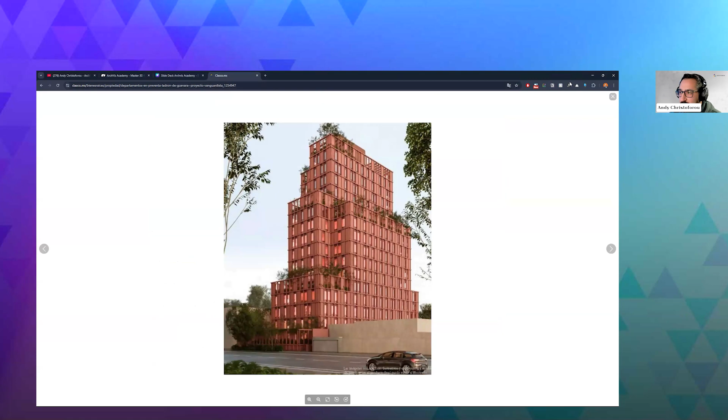So how I start is I go over to D5 and I'm just going to hit new, and it's going to load up a project. While that's going, let me just check the chat, see if anyone's in here or any questions. Cool, all right, great. So I'm going to X out of this and go full screen.

With any D5 project, the first thing I always do is switch the navigation mode from orbit to fly, just because I'm most comfortable with the WASD controls, and all the move controls are down here. I'll talk about which keys I'm pressing, but if you see me moving differently from you, because default is orbit, that is why. I don't believe in orbit, I'm team fly here. So let's get started with importing.

First thing you do, you go up here to import. There is a SketchUp plugin, but for those who don't have SketchUp, you can use the direct import method. So I'm going to hit import here, and I'm just going to open up the SketchUp file. You guys have this in that link that's been shared. And now it's going to be added to my import container right here.

Always remember that the import container is different than your object outliner. This shows everything in the scene. This shows everything that is in your import container that has to be imported into the outliner. So I'm going to click once and then click here. Right now, this model is in the middle of nowhere — it has an incorrect coordinate system.

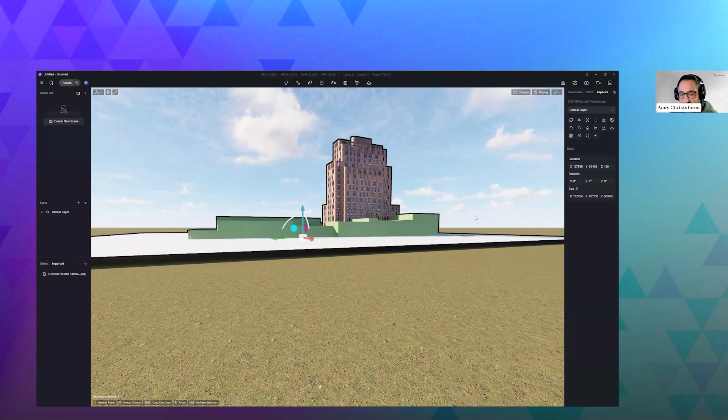So we're just going to hit this button called sync coordinates. This is really important if you work with multiple people at the same time. Let's say you're an architect working with a landscape designer—they need to bring in their own file. If you use sync coordinates, everyone's coordinates will sync to the same place. For those Revit users, you know how important coordinates are. So I've got that there.

You can also see that I've got terrain clipping in here. So I'm just going to go over to my object outliner and hit the eyeball on terrain to turn that off. Next thing I always do is make sure I don't work in the dark.

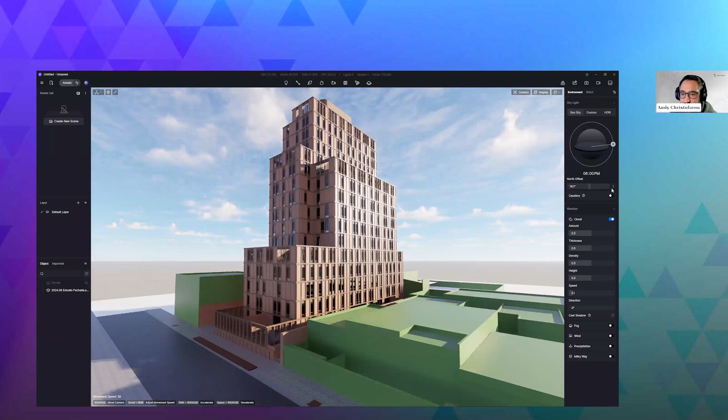So right now the front face of the building is in shade. The side is bright, but when I'm doing materials, I always want to make sure I'm working in sunlight. So I'm just going to tweak the north offset just to get a little bit of sun on both sides. Exactly. Now I can actually see what I'm doing, because you should never work in the dark.

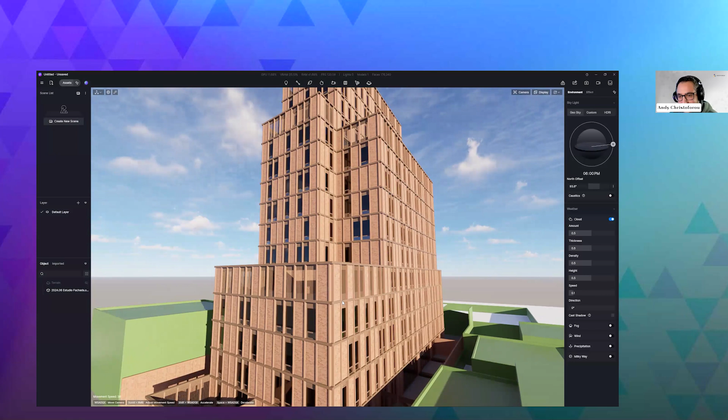So first thing we want to tackle are our materials. Then we'll get into adding some entourage—trees, ivy, and all that—and then the context, and then we'll take some renderings. Right out of the gate, I feel like the model already looks better than the reference images, and I think part of that is due to the SketchUp model actually having mapped textures.

One of the issues, or issues and benefits, is this is a texture map that someone actually spent time to map correctly. There's no half bricks—there's actually some beautiful brickwork here that they took the time to map. So I don't want to overwrite their work or put a new material that doesn't map correctly. I can actually use this. So although it's a flat texture from SketchUp, I can modify it.

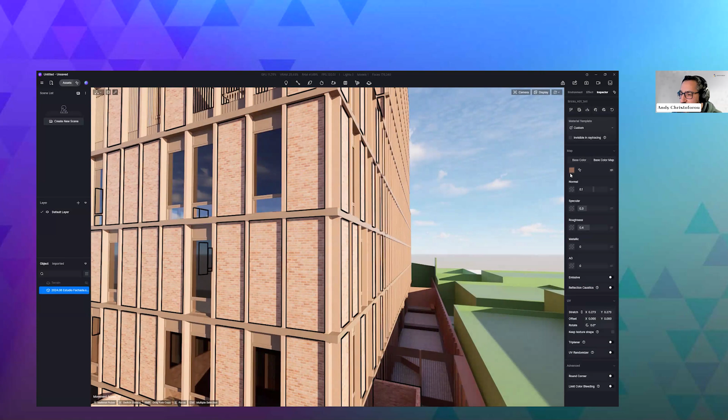I'm going to hit I on my keyboard, or click the eyedropper, and click my brick material. Anything that's brick is going to be highlighted in black—this is how D5 tells you if something is selected or not. So now that I've got the brick here, you'll see I only have a base color map for this brick. It's missing all the other maps, and because of that, it's not super realistic.

D5 has some amazing tools to improve that. This is a low res brick material, so what I can do is use the built-in texture enhancer and run an Ultra HD texture enhancer. It's kind of like if you've used Magnific—an image upscaler. It's going to take this super pixelated, probably 512 by 512 texture and make it look like 2K, so I can preserve all that mapping without starting from scratch.

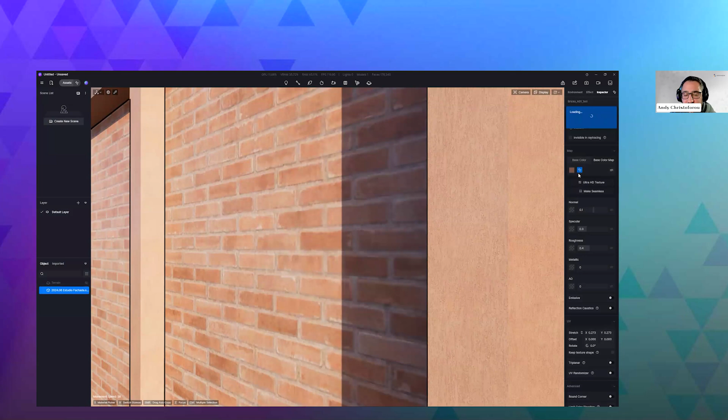So it's thinking for a little bit. Once it does that, I can run it through the AI generated material. Yeah, look at that—so now much cleaner. I'm just going to hit confirm.

Now I can run it through the AI generated texture map tool, and it's going to look at this and generate a normal map, a roughness map, and an AO map. These are things architects and designers hate to do manually, so I love that it's built in here.

And it's an automatic process, because to do this manually you'd have to bring it into Photoshop or another tool like Bitmap to Material. You'd have to convert the image to a normal map, then convert your base image into black and white to make your roughness and everything. It's time consuming—nobody does this. That's why in-house renderings sometimes look flat, because people don't know you need all those maps. D5 understands that, and they've basically fixed that workflow issue.

So right now it's going to think—and look at that, it's added all this detail here. It added the normal, and if you don't know what that is, it's basically how proud the brick is from the mortar. It added the roughness map, basically how shiny or where the brick should be shiny, and an ambient occlusion map, which is AO.

AO just controls the contact shadows—here's nothing and here's something. So it just added all that realism in just seconds. That's why I'm a big fan of it, and I didn't have to use anything from the D5 asset library.

I used something built right into D5. This looks great. All I'm going to do is toggle something called round corner, and for any exposed corners, it's just going to round it out. I'll show that in other materials, but it's a good habit to get into, because nothing in the world is perfectly straight or sharp like this. We'll talk about fixing that in a moment.

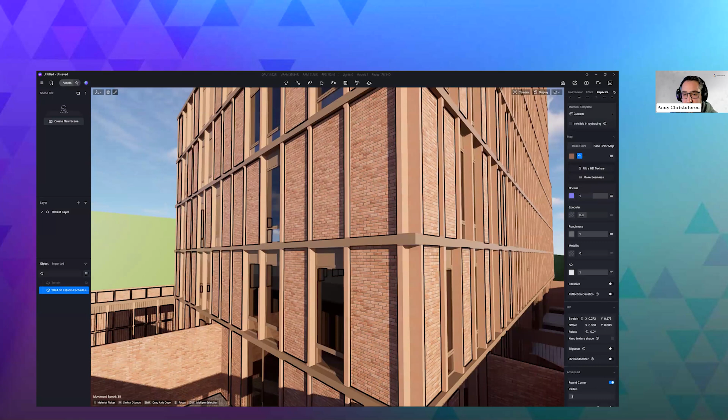So now that the bricks are in a really good spot and they look realistic, not tiling or anything, this is all mapped nicely. Let's start working on the other materials. There's a couple we need to tackle: this spandrel kind of tile here, this vertical plaster stucco material, and the landscaping materials. Let's work on these vertical guys.

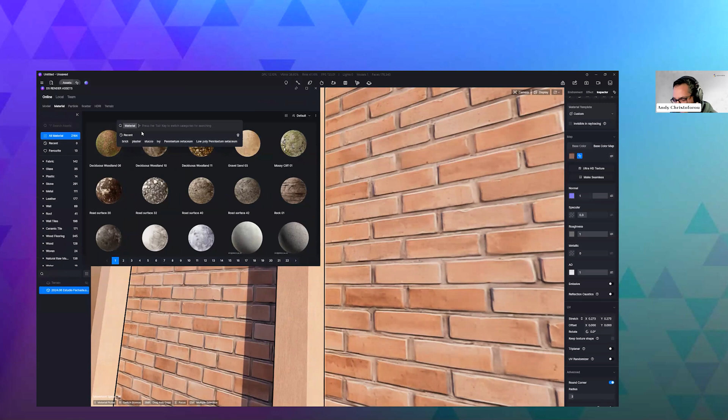I could go through the same process we did, but I want to show you the fun parts of D5 and the asset library. So I'm going to go over to assets, click that, make sure I'm under material, and look for some sort of plaster. You could search for plaster or paint. We've got this — let me try beige plaster.

I know you're probably saying, well, this is beige and this is like red and orange, but I'm going to show you how we can tweak that. I'll hit I on my keyboard, and now we can see everything is this gray material. It is high res though — if I get up really close, I can see all the different pores. It looks super realistic, but I do need to tint it.

Right here under base color, if you click this, there's a little color picker. For those that work with Pantone chips or even metal samples, you can hover over a picture and it can be outside of D5 — it doesn't have to be within D5, it'll pick up those colors. Like here it's picking up my skin tones and my background as colors. So if I click anywhere on this brick, I now get that same color of the brick.

All I'm going to want to do is probably desaturate it a bit so it's not that vibrant color. That's what these guys are — hue, saturation, and value. Saturation lowered is going to desaturate it, and value is going to brighten it, moving these guys in the respective coordinates. So you see that? I'm happy with this — I don't want it to be too orange.

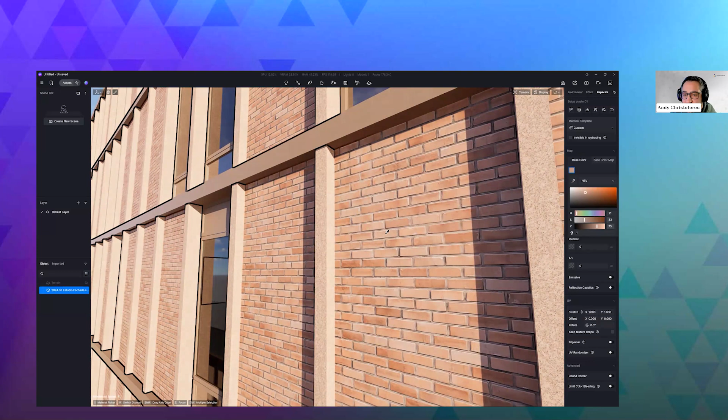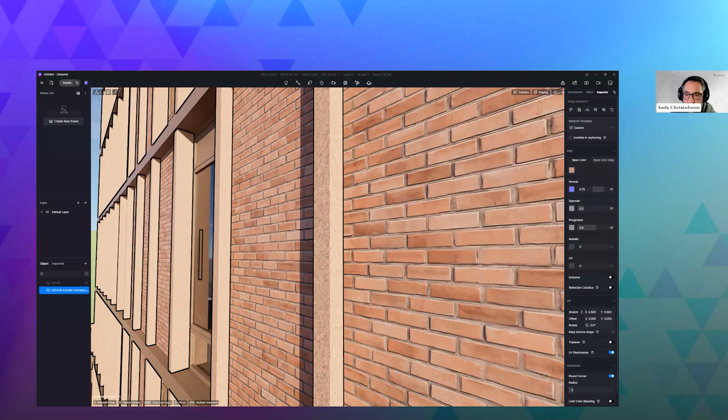Now that looks good, let's go through some of the settings. I think these are all calibrated correctly. I'm going to turn on UV randomizer just to make sure it's completely seamless, and turn on round corner, which fixes this edge here, because with plaster and how it's molded on, you're never going to get that sharp corner. That looks good. I could play with the scale some more — let me try 0.5. That's a little too extreme, so I'll do 0.8. Every single material and texture is going to be different, so it's not like you can always say it's got to be 0.8 — it's going to change, so keep that in mind. I'm happy with that.

Let's talk about this spandrel kind of thing — it looks like a terracotta tile. I'm going to go over to assets and go to wall tiles, and I've got all these fantastic options. Let's find something that fits. This one looks good — I like this dark red striped stone. I'm going to click this and paste it here. And it's coming out dark.

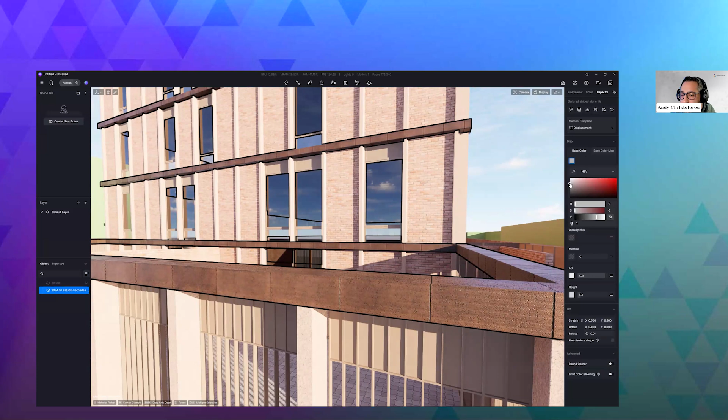So I'm going to do the same exact thing — I'm going to edit it and play with the base color. Here I'm just going to brighten it up by going up like that. Then if I want to take it to the next level, I can go to the base color map and desaturate it, which removes some of that color, and I can also brighten it.

So I actually like the look of that. Okay, cool, so we've got that. And just looking at the material, I can see the normal's working, the roughness is working nicely. I'm getting some nice variation, so that makes it look nice and realistic.

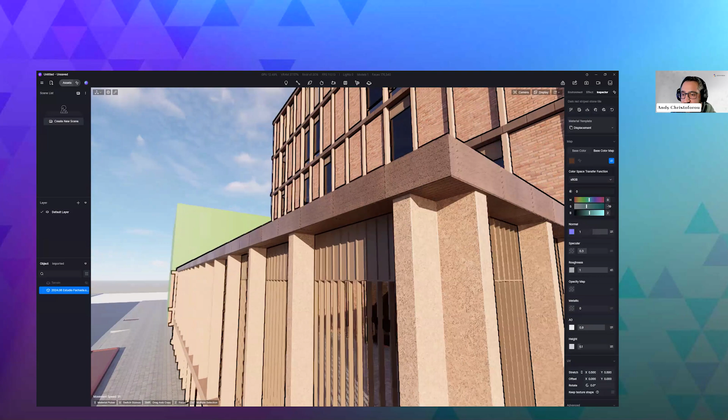Then we've got this metal here, that's basically the top and bottom of our windows. So you could do a similar workflow where you edit a material from scratch. I could play with the metalness here to tune it, or find something from the asset library. Since this is coming from the architect, it's very likely they've picked this specific color under the base color, so I don't want to mess with it too much, but I do want to play with the metallic settings. I want it to look like it's actually metal.

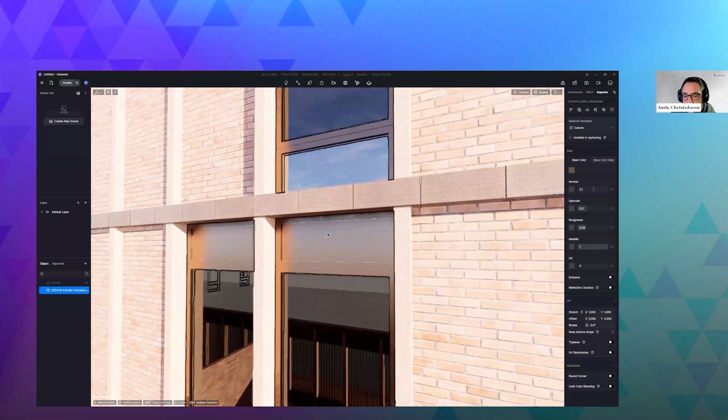You can see a big difference. That's flat, this is metal. So just doing something like that makes a big difference. Same thing with playing with the roughness - a 0 roughness will be mirror-like, higher than that is going to soften it up, scuff it up. And then this is kind of like rubber, right, which we don't want. We want something like this. And the normal here is helping break up the reflection.

So this is nice, this looks like a nice anodized panel. If I want more realism, I would probably grab something from the D5 library that's got some sort of texture - you see this, like the brushed aluminum. So that's something I could do.

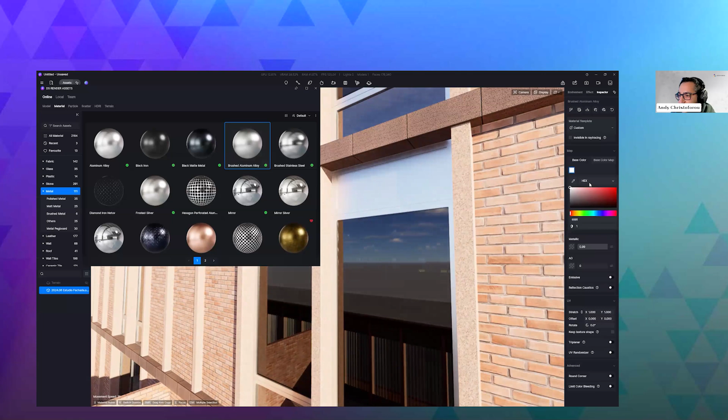So this is what I would do. I would grab my color values here, switch to the hex, and copy this to my clipboard because they probably want this color on purpose, but I do want the vertical lines here. So I'm going to grab this, paste it here, and now go to base color, keep my hex, and paste that. And that just took the same exact color, but look at that - now I get the correct base color and I get the normal that's controlling that, so it makes it look slightly more realistic than before instead of it just being a flat color.

So keep in mind that is a super handy trick that people often forget - hex codes go a long way.

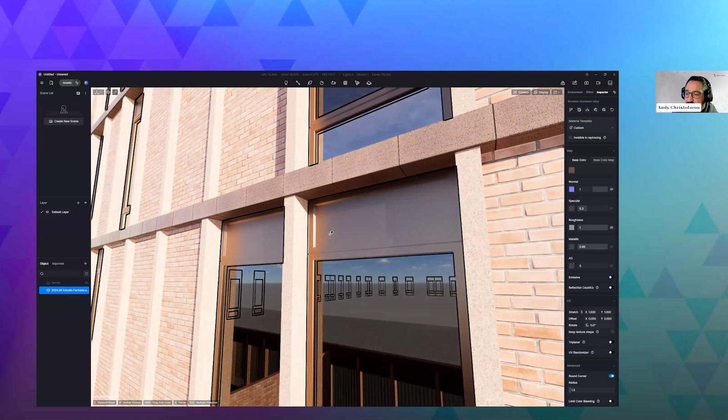Same thing with round corner - we're going to do that and get some nice corner edges right here. Let me toggle that on. You can see we're getting nice highlights here because they're molding or bending the panels. So I can lower this radius a little bit if it's slightly too strong, or make it bigger - you don't want to go too far, just a little bit of a highlight. That's how you know it's working correctly because the sun's hitting that edge. So that looks great, happy with that.

And just for the sake of my sanity, I'm going to hit Control S on my keyboard to save. And like a bad architect, I'm going to put it on my desktop. Sorry. All right, any questions so far?

Looks like chat is empty.

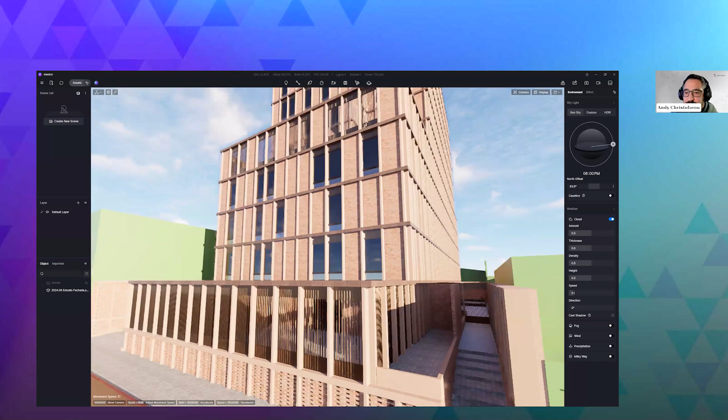That's fine. So now that we've got all that, let's work on the glass. So the glass, this is just a default material. I personally always go to the glass library and start with normal glass, so I grab that and paste it here.

Usually what I do is once I get the HDRI, so like the background and the time of day, then I tweak the actual thickness and opacity. So right now it's like 100% see-through - pay attention to the windows out here, I can see right through.

Then that's kind of when I start playing with, okay, are the reflections too bright, too dark? So it's hard to do early on until you have everything in there because you're not judging it off the final outcome. That's why I kind of leave it in limbo, in progress.

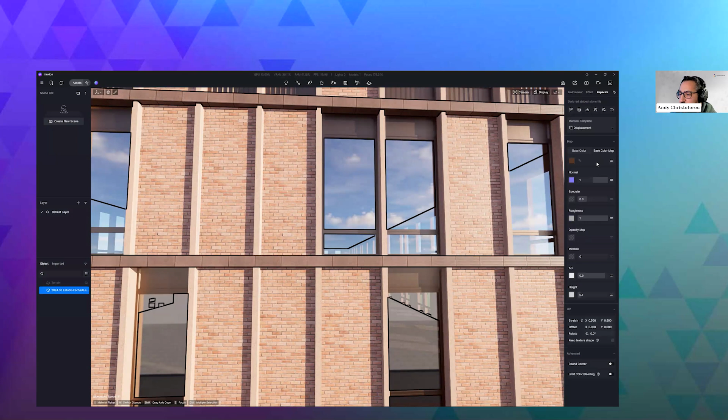So just looking at this overall, I'm pretty happy with it. There's some things I probably would tweak - I might just brighten this area up so I'm getting similar tones with the rest of the materials. Exactly, so that looks good.

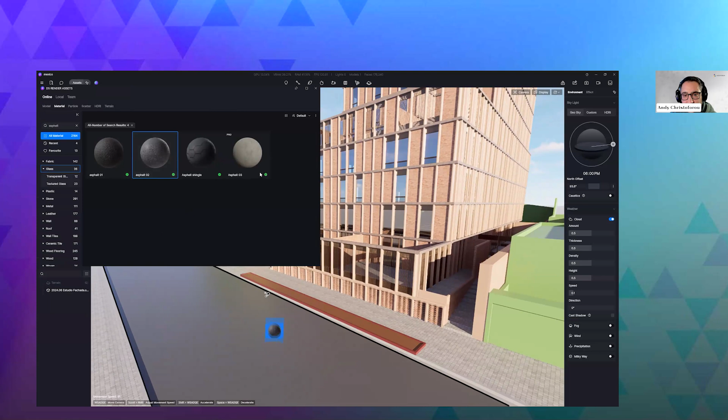So now let's talk about the context, our asphalt here, and all these guys. I'm going to go over to assets, and since I want asphalt, I can just type in asphalt - I don't need to find the category. I'm just going to grab this guy, asphalt 2. I could use 3, yeah, really depends. Let's see how this is.

So you can see, and this is why, if you guys watch my content, I always use the UV randomizer, because you see this tiling right here.

If you look really carefully, pay attention to this little triangle right here. That drives me nuts. You don't want that.

So I'm going to edit the material and put on the UV randomizer. But you're probably saying, well Andy, there's no UV randomizer option. That's because the displacement material template doesn't support that. Since this is asphalt, in my opinion, you really don't need displacement. So I'm just going to switch to custom and then I get that back. I can turn on UV randomizer and boom, it's completely gone. So it still looks beautiful and realistic, but I don't have that weird displacement thing turned on.

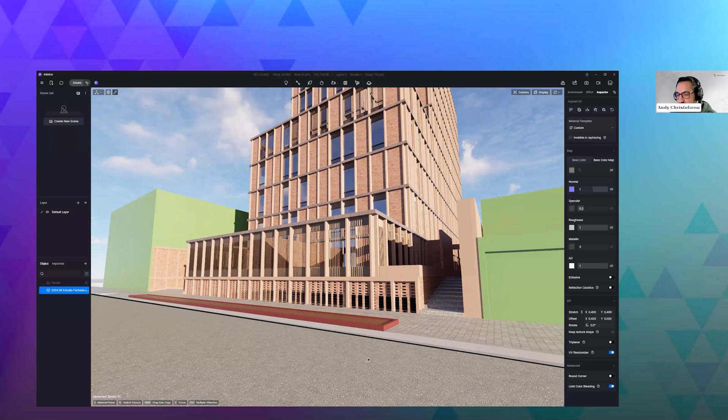So I could play with the scale some more if I want. Let me try 0.2. I think that's way too much. Do 0.4, that looks good. You always want to be able to see some of the texture. If it's too small, you can't really appreciate it, right? So sometimes I might go a little bit larger than you would typically see, because without texture it just looks flat.

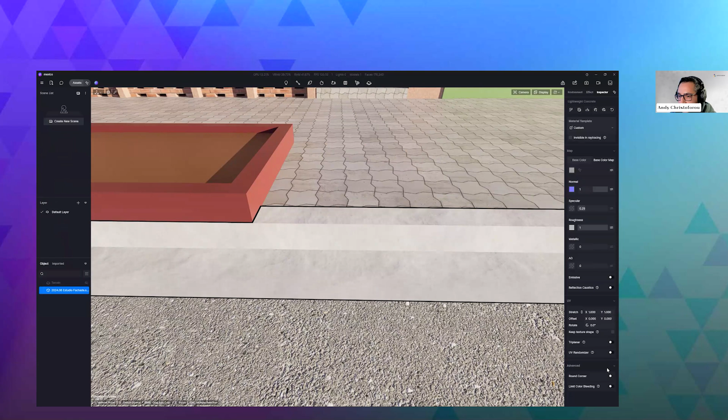So then let's go over here. We've got our curb, same workflow. Let's go to assets, and I'm just going to search for concrete, right under the concrete here. And lightweight concrete is totally good enough for this. So I'm going to paste that in. And like always, I make sure I've got round corner on, because we all know how concrete formwork works.

I'm going to leave that there, and I'm going to put on my UV randomizer, so that's all mixed up. And that looks good. I might bump up the scale a bit, let's go 0.5. Yeah, perfect.

Cool, all right. And now we've got kind of like this little planting area. So I'm just going to get a little curb for this and we'll get some soil in from there. So I'm going to again go with rough concrete, we'll just mix it up. And as always, get that round corner on. Boom. And now let's talk about the soil here.

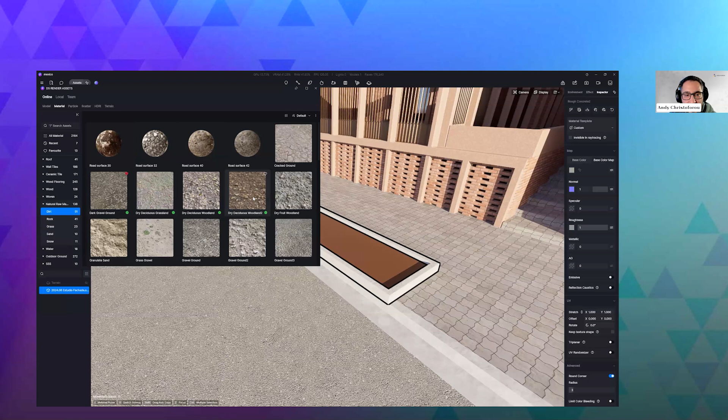This is going to be under natural raw or outdoor ground, there's a couple different options. I'm going to go with one of these. I like the stuff with leaves, because generally plants drop some sort of leaves, right? And this looks pretty good.

All right, so now all that's left is we've got this and we've got our context here. I really like the tiling that this person's done before in the SketchUp model, so I want to preserve this. We're going to go through that same workflow that we went through before. You go to base color map, go here, and then make it Ultra HD, so that's going to boost the resolution of this. Because again, they mapped it perfectly, I'm sure it was a spec from a project.

So I'm going to use this. If, let's say—this happens to architects all the time—you're working on a granite and you find the spec but it's tiling, you could use Make Seamless and it'll fix that. That's really handy. So again, use these tools, it's built in. It saves you so much time because you're not going to find everything in the D5 library, right? Like this is very, very unique. You'll get close, but it's not going to be perfect.

So this is now loading up the normal map, the roughness and AO, just so it gets a little more realism here, because this covers up a lot of surface area. It's important, like the large swath materials look the best, because that's kind of what gives away if it's a rendering or not. So this is loading.

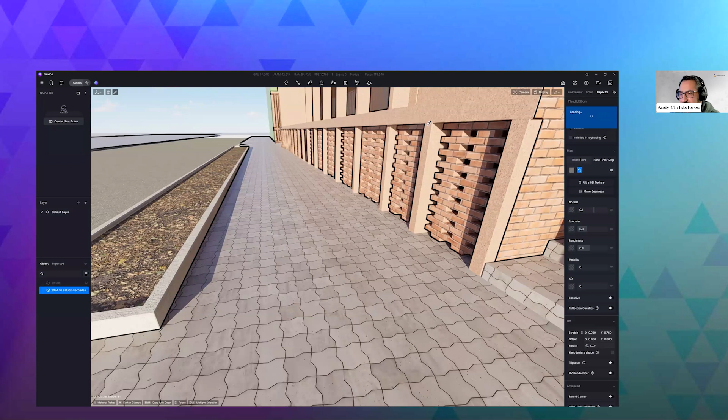And you could do things while it's loading, you could fly around, but I feel like I got into the habit when I used to do a lot of drafting to not jump around, because you never go back. So it's just something I'm scarred from.

So I've got this here. I'm going to lower the roughness a bit just so I can see some slight reflections here. You see that? I do want some gloss to it because it is kind of like a stone, yeah, some sort of polished stone. So we want that. I could boost the reflections with specular, you can kind of see that, but I'll leave it somewhere around there. So happy with that, turn on round corner. Okay, I should get a t-shirt that says turn on round corner.

And for our context, this bright green - every office handles it differently. Some do glass, some do basswood, some do white paint. So I'm going to go with the white paint method.

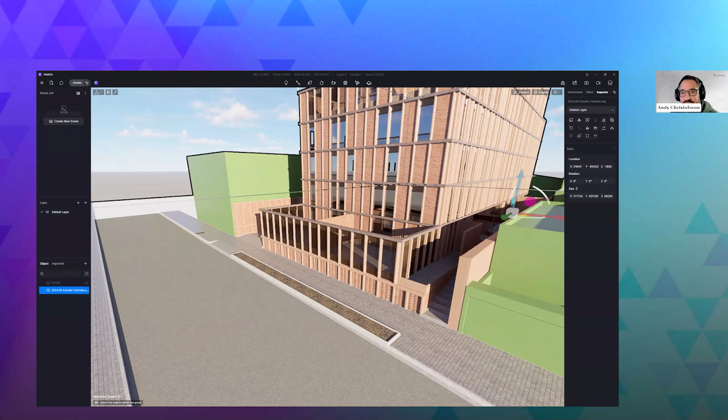But what I do want to say about context is in D5 2.10, the update actually added a city importer. I don't know exactly where this project is, but let's say you're working on a project in New York, because New York models are really hard to find. You can actually create a selection, so let's just say Bryant Park.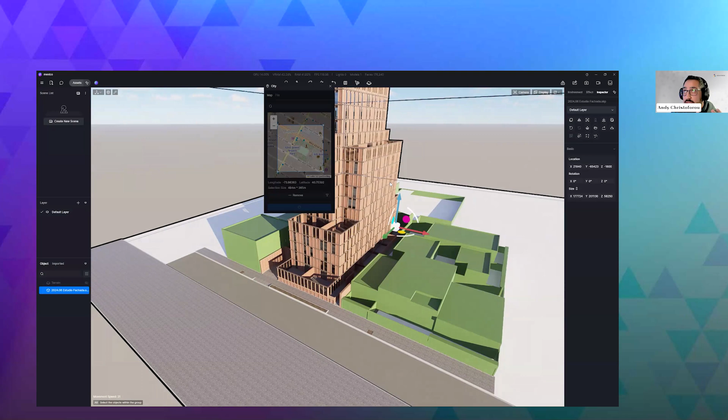You can ask it to import OpenStreetMap data for you. If I hit import, it's going to think for a little bit and give me the terrain, the buildings, the streets, and parks. This is huge because doing this manually, using ArcGIS and then importing and optimizing it for Rhino or SketchUp, is not great. So I literally have the city model right here, and these in my world outliner are all the categories, so I can toggle on what I want.

This is super handy - we've been using it a lot at the office just because the manual way isn't good. I'm really glad they added that. Soon they'll add textured buildings and that'll be huge, but this is perfect for now. I'm just going to delete that, but I wanted to point out that you don't need to manually model buildings.

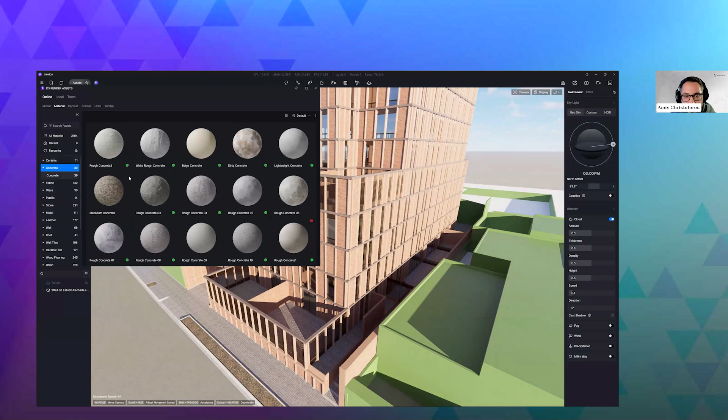So what I'll do here is find either a paint or a concrete, let's just see - and again, you can make it glass, you can do whatever you want. I'm going to do a beige concrete, and I don't want it to be beige, but I do want to show you how I'd fix that. So I'm going to go here and just desaturate it.

I spend a lot of time in the advanced settings of the base color map. If you just desaturate that, it's now gray, and it's a little bit easier to play with the coloring or the tints, just like that. If you want it darker, bring it down; if you want it lighter, bring it up. And all I'm going to do here is turn on my round corner and just play with the scale.

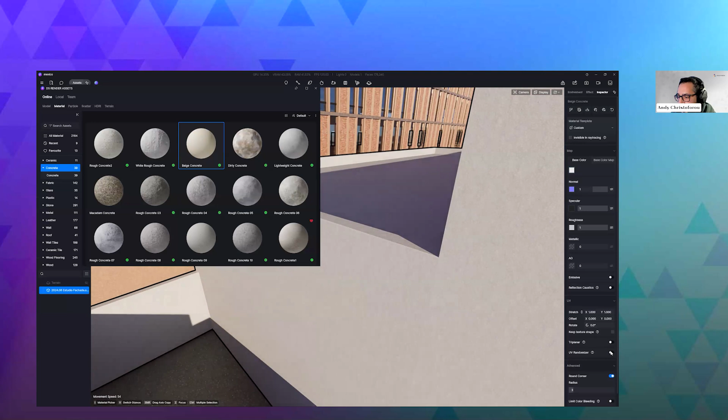So I'm going to turn on triplanar, that way it evens out the scale on every single face, and the UV randomizer, so nothing tiles. From far away, do we see any tiling? No. And I do like the amount of texture we're getting here - that looks great. We're only about 20 minutes into this, and we already have all the materials done for the project, which is pretty amazing.

So now I want to talk about adding some vegetation. I'm going to just look at the reference project, and you can see there's a planter right here, some trees, some ivy at these courtyard areas. So let's do that real quick.

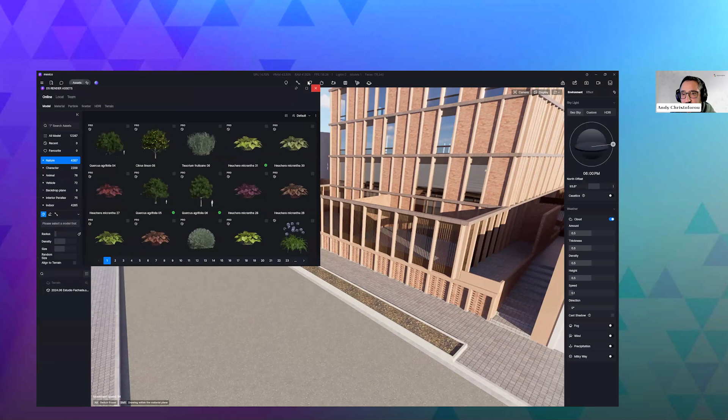D5 comes with a bunch of different vegetation methods. You've got a brush tool, which literally lets you paint with a brush. You've got a path tool, so you could say, hey, from point A to B, give me this. And then they have scatter, which is really powerful for handling dense forests and large swaths of area to be covered. For this, I'm just going to grab a path tool.

I'm going to go right under the path tool and click right here - point A to point B. Right now you can see nothing sticking because I don't have anything selected. You'll notice in the top right corner there's a little checkbox asking what kind of plants you want. That's a good question.

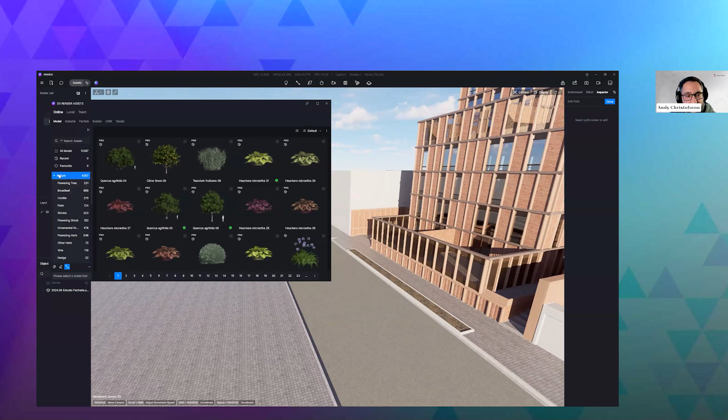Let's go down to shrubs, and I can grab a bunch of these, nothing too specific. I'm just looking for something that looks low level, nothing too tall or colorful. You have to be careful with the colorful stuff because it can completely take away from your rendering.

So now that I have a couple in there, let me just click from here to here. Now I've got a path, but there's not enough items here, so let me hit done. Now I can go in here and increase the amount of plants.

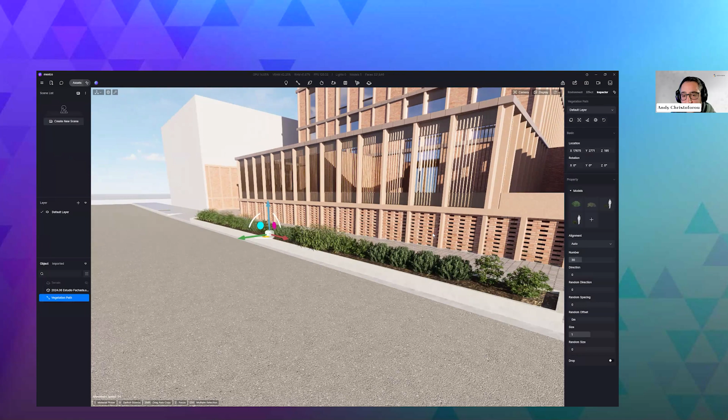I probably want some more species, that way I have some more variation. But that's how you can easily modify this. Even if you X out of this path, like you click something else, you can click it and it's all editable. What I love about this tool is you can introduce a random direction for all your assets. That's really nice, random spacing, right? Because plants don't grow right on top of each other. A random offset off that line, and a random size, which is really, really handy.

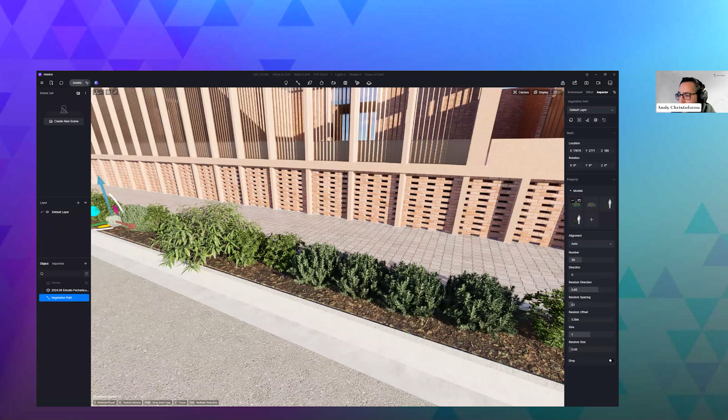So like I was saying before, I'm not happy with the amount of variety I have here, so I'm just going to hit plus here. That's going to let me add some more plants. Let's keep scrolling through. I like this guy, we'll add him. Okay, that looks nice, and again the color there is kind of muted. I'm okay with that. Let's also add this and see what that looks like. Okay cool, and I'm just going to boost the number. So we've got a bunch of plants there.

I just basically want this full. The other way is you could manually just place assets, and I'm going to do a couple of that right now. So let me just go to like flowering tree. If I just want key, critical trees, and I don't want to worry about the path, I can just go to the asset library, and like any other asset, I can just click a tree and place it. So if I want Magnolia 2, I can grab that and place it right here.

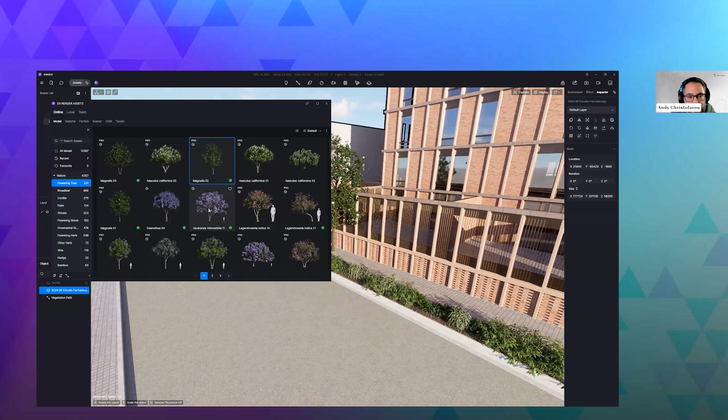I think this is slightly too large, and the little flowers are bothering me, so I wouldn't use that. I want something slightly simpler. So it's a good idea not to use flowering tree if that bothers you, and I only say that because it could be a little distracting when you just want someone to focus on a specific area and there's color popping out. So I could do something like that.

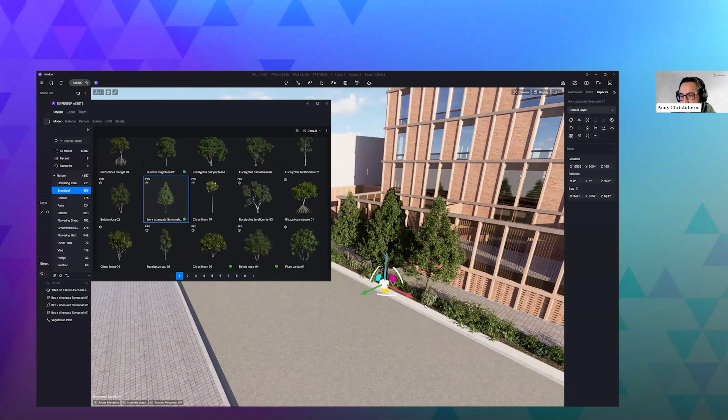You can see by default it's automatically changing some of the scale of my assets. So here's a handy feature: if you look over here, this is the species, so it's these ilex plants. I'm going to shift click to select all of them. I can actually rotate all of them with this little button here, so again, that's going to break up, give you some variation. You can also randomize the size, so that's helpful as well.

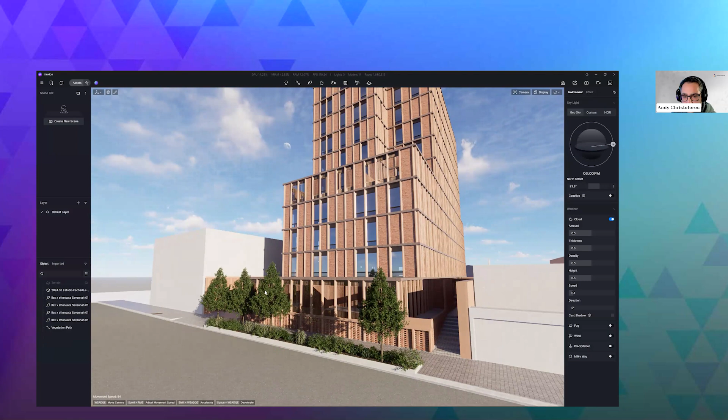You can also randomize the location, but I don't do this because I kind of want them in a line. You can also single click any of these, then hit V on your keyboard and just shrink them or move them. And another little tip with this gizmo, the move gizmo: if you hold down shift and drag out, you'll make a copy. So you've got a couple different ways to handle trees and plantings like that. I'm going to delete probably some of these inner trees because I just want a couple, maybe we do like 3 and we'll do 4. And then I can just randomize it like that.

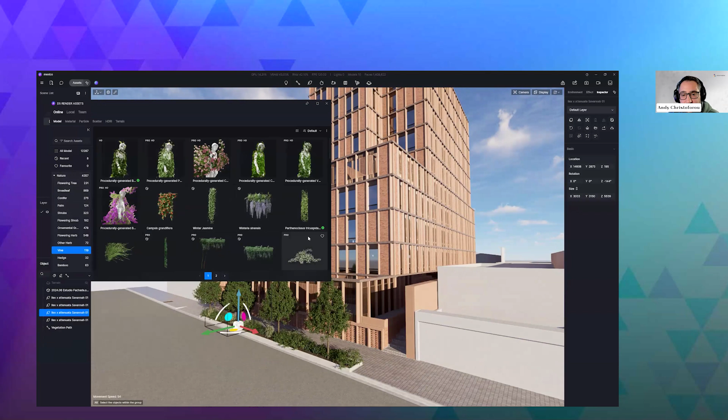Perfect, so now that we've got that, let's add some ivy. Ivy in D5, I'm going to just say, can be handled in 2 different ways. If you go under Vine, you have the static assets and procedural assets. So static meaning I grab this and it's a mesh that I can apply to any surface. So let's say it's growing from here, right? This is static, it doesn't matter what the geometry is, it's just its own 3D asset that can clip through things.

There's also the procedural system. So if I grab this and place it right here, you see this little projector beam. If I rotate it, make sure the arrow is pointing at the face you want it to go. So I'm going to say somewhere around here. Okay, let me just rotate this just a little bit more, I want it to spawn there. I'm going to scale it up, and it will spawn ivy on this face. And this thing is crazy.

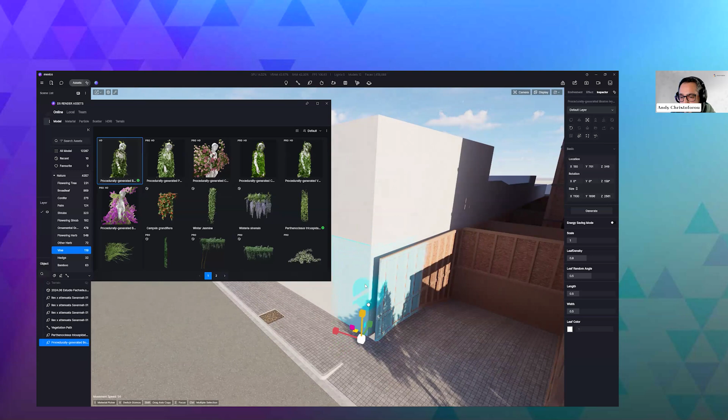This is like, I love this thing. This is like an amazing tool that D5 has. So watch this: when I'm happy with that, I can hit generate, and it's going to look at the geometry, and bam, it's going to build it over that geometry. It's not perfect, I am going to get some clipping there because there were 2 faces next to each other, but this is all dynamic.

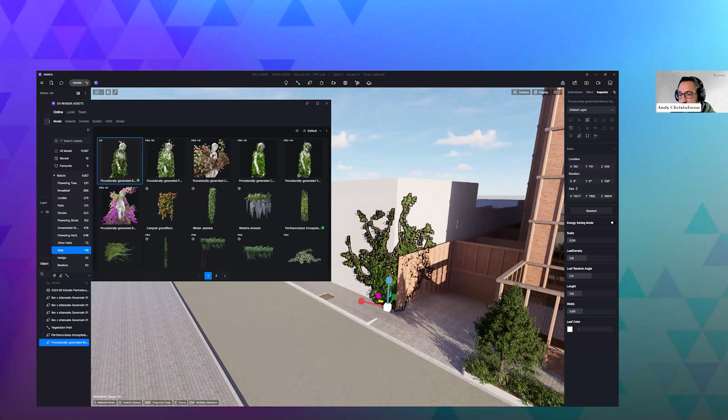So I can change the scale of my leaves, I can change the density, the angle, how wide or far it grows out. And again, it's paying attention to the geometry - I can't stress that enough. I don't need to manually set dress each area I want ivy, I can just use the procedural generation tool and it'll figure it out for me.

So that's really nifty. There are some areas, like on smaller geometry, where it's probably better you grab one of these and place it manually, just because it doesn't recognize it 100%. It's close, but it's not perfect. So they make some that kind of drape over like this.

Watch this - I grab this, I can just do this, move it into place and hit V. I can also scale in one direction, so if I break the scaler here and hit V, I can go this way if I want. I'm going to shift copy and scale a little bit, just kind of want to break up the sizing so it doesn't look so samey.

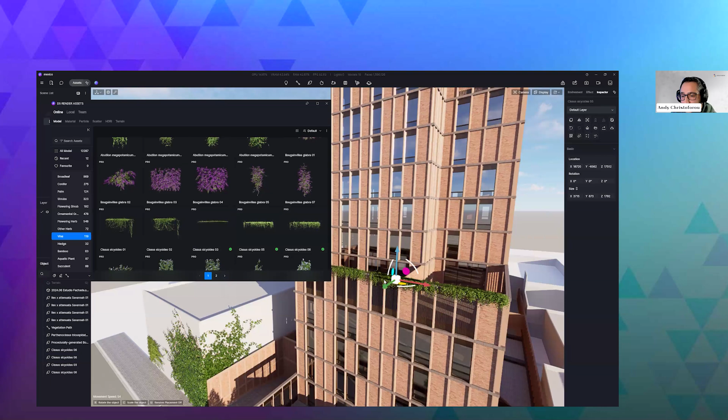I'll also swap out assets - this I can swap with another asset. If you go over here, hit this crown looking button and hit replace from assets, you could switch it with something else and it will replace it with that. Let me hit confirm and do that one more time. There we go - you gotta make sure you hit the check mark. I had it on my cursor, so that's why we had a duplicate, but that's what you can do.

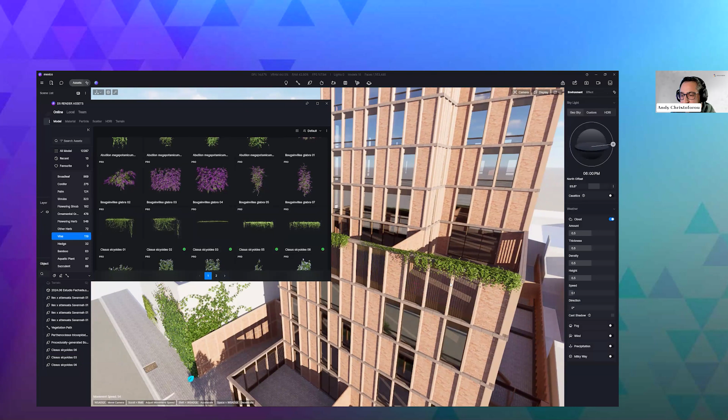So if I want to switch it back to something else, I can click that and this should swap - yeah, there we go. I'm just gonna drop that in there. It looks a little weird, but anyways, you get my point. There's a couple different ways to handle the ivy here, procedural or static. So I'm just gonna turn the corner here and then we'll add some more plants, we'll add some cars, and then we'll do some environment settings, and that's it.

So once I have kind of like a stretch that I really like, I'll turn it into a group or a copy. So I'm happy with this - I'm going to hit control and now I've got two selected here. I can right click and make it a group, and now when I click one of them, all of them get selected.

So I'm just going to shift copy to bring it down this direction, and rotate it. So now I can just put it here. You always want to make sure that it's not clipping, that it sits appropriately. And I'll bring it out a bit - again, that's my point on clipping. So it looks great. Okay, I could do the same thing up here as well.

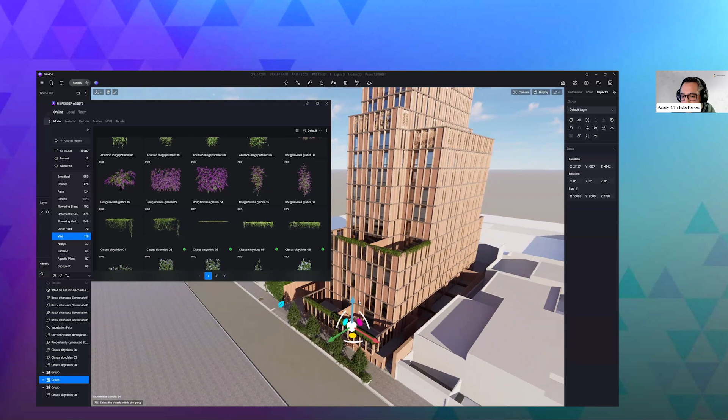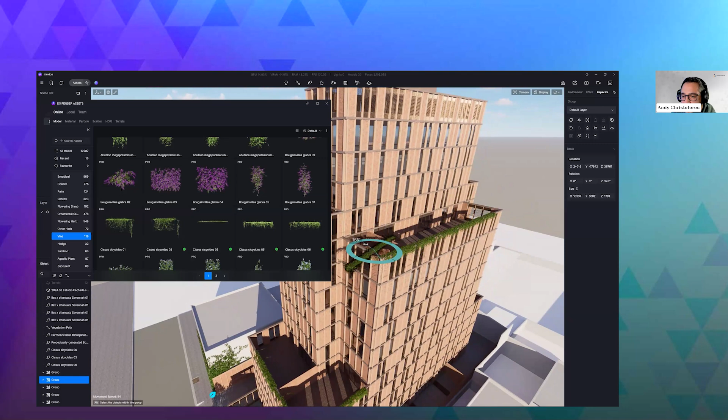So I'm just gonna shift click, we'll rotate a bit, and I'll go place it up here. I don't know exactly where they're gonna have ivy, but if I were doing this, it's kind of what I would do. I've got that, and then I can just shift - I'm not too worried about the sizing and scaling just because I'm taking a front rendering. It's very unlikely that somebody's going to be able to see all that. So that looks good, and I'm not too worried about that collision there because that's inside the building.

So now I'm just going to add a couple trees in here and kind of beautify it. You could spend as much time as you want doing this. This, in my opinion, takes the most time, but I feel like it gives you the most bang for your buck in terms of time, because if you do it right, it's really gonna improve your building. Look at that - that added so much richness to the building in just seconds.

So let me grab some more trees, grab something a little thinner - yep, let's grab this guy. Anywhere I think is a courtyard, I'm going to drop it there. So right now you can see this is huge, so if you hold down C on your keyboard and drag down, you can scale in real time. So I'll drop that there.

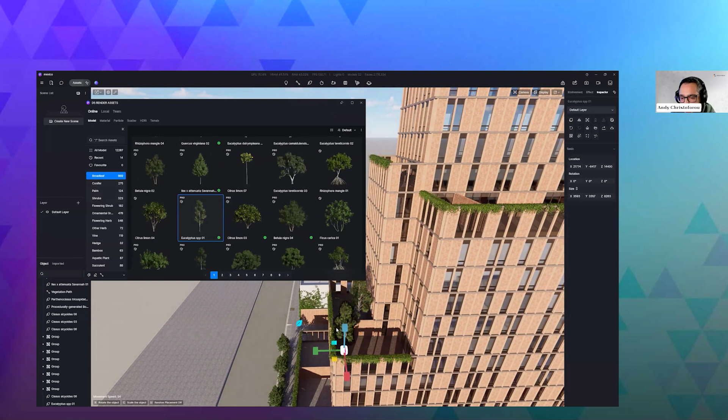And we'll place a couple here, and a couple up here. And I can always go back and reduce the scale. Okay, so I think this is slightly too large, so I'm just going to hold control and scale down.

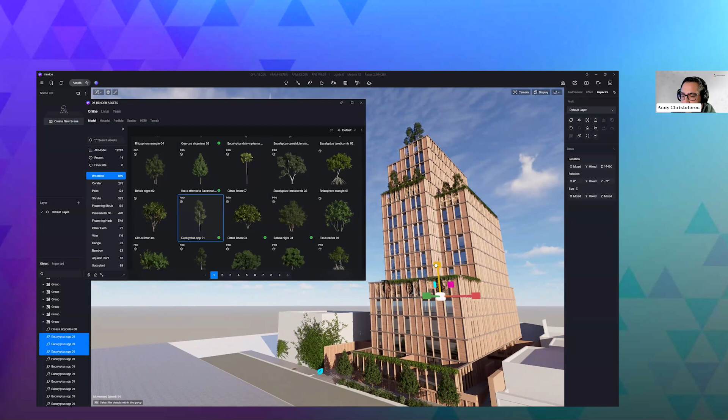So a little cool thing I want to point out, we've got all this amazing vegetation, and I want to show a before and after. I'm going to make a new layer and call it vegetation, and I want all the trees and plantings I've placed to be on that layer. Right here is a filter—if I click it and click nature, then shift click all this stuff, up here is the layer it's on. If I switch it to vegetation, it's now in the vegetation layer. If I turn this off, look at that. And that only took 2 seconds to get organized, but it's a huge before and after, right?

This is actually how I handle options. I'll put an option on its own layer and then toggle it on and off, because scenes and the rendering viewport can remember visibility of items, objects, and layers. So keep that in mind.

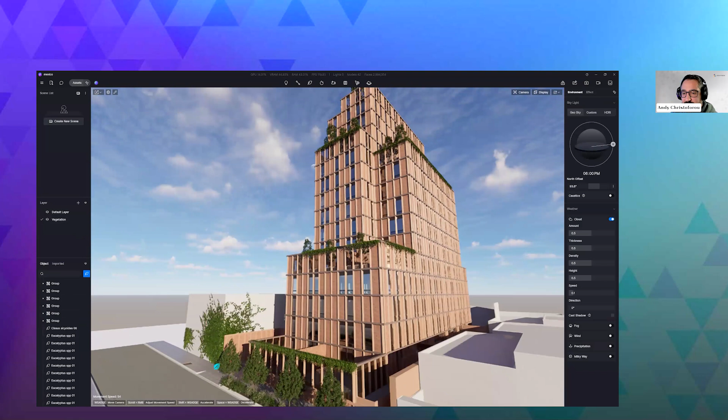So I'm going to save there. Now that I've got that, I'm going to drop in a car and we'll talk about environment settings and then do a little rendering. So I want a car—I'm just going to go under vehicle and grab something small size. I'll grab this Lucid here and just rotate it.

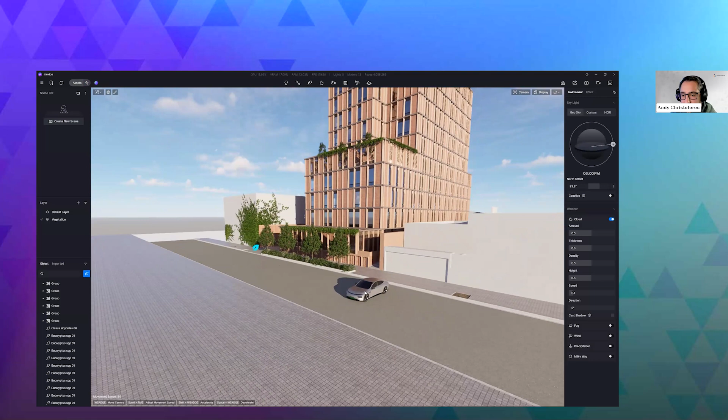Okay, and for some reason... there we go. All right, great, so I'm going to place this here. I'm in the US, so we drive on the right, but it's probably more like this—but don't mind me there. I'm doing this because I want to show you a cool little feature they added in the AI enhancer right when we do a rendering.

So talking about the rendering, let's get that set up. Right over here, create new scene—if I do that, it's basically a hotspot. So if I move my camera here and go here, it's going to move me to that camera point, and it's going to remember all the time of day settings and visibility settings. So really, really powerful that you're using this.

There's also an easy way to walk a client through if they're sitting next to you and you want to do kind of a 3D tour. This is what I would recommend.

So if I want to edit the camera settings, I'm going to click this little button here—yes, that's actually a button, a lot of people don't realize that. This is telling me that it's an active view. If I uncheck this, I'm actually going to get a picture-in-picture view, which is pretty handy if you're set dressing and want to see what the viewport will look like.

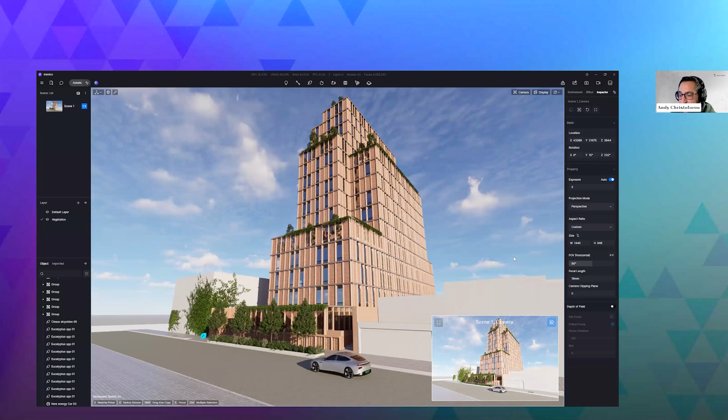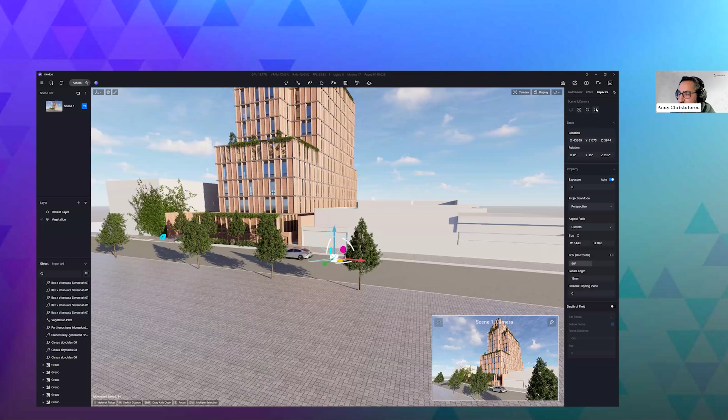So if I pin this, this is the camera, right? And watch this, this is where things get cool, because if I shift out here, I can now see how this tree is going to impact my rendering. I'm going to have a bunch of these trees because I do want the shadow on the road, but this is also how you can frame whether you should have trees around the view. So remember, you've got a little picture-in-picture mode—activate here or there to do that.

Now that I've got that there, I'm going to turn off exposure—auto exposure always gets people in trouble—and I'll just lower it a bit so it's not so bright, just for the sake of this. I'm going to switch projection mode to 2-point because you want nice, strong, beautiful verticals, and this is like how all architectural photography is shot. So I'm going to do something like that. That looks very heroic, I'm happy with that.

Then there's the focal length—everyone's got different preferences on this. I'm going to boost this a little bit to like 22. I don't like going too high or too low, just because it gets distorted.

Okay, yeah, we got 15 minutes there. Yeah, we'll make it.

So we've got this there, let's do 20, that looks good. I'm trying to balance getting the top of the building and the trees. One thing I can do is play with the aspect ratio—16:9 is what we're typically used to, this is your landscape format, but our building is quite tall, so I could do something squarish or portrait-like. So this is a portrait format. I do need to play with the focal length to fit everything in here.

I really like the framing of all this. I've got the framing here of that tree, and I can also see my car here. I like the framing there, so I'm good with this. I really like seeing all this variety there.

Now I'm going to turn on depth of field and set a focus. I want it to focus on the building, so I'm going to left click the building, then right click to cancel that. Now watch this, I'm going to add the blur. You see how it blurred anything close to me?

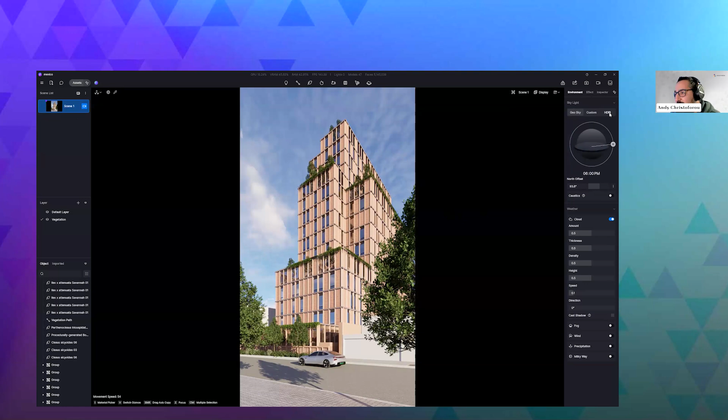Now let's get into environment settings. We were just using the dynamic geo and sky function, which I think right now looks phenomenal. This looks great, I'd be happy with this rendering. But if you want to take it to the next level, I recommend using an HDRI to improve the realism, because it takes the lighting and shadow information from the HDRI to give you really nice realism.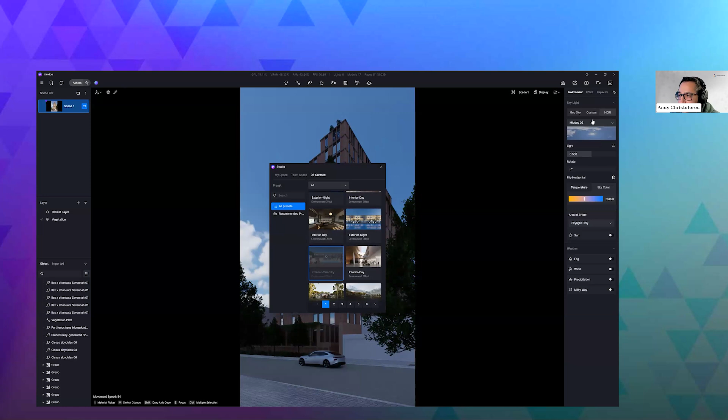If you don't like messing with all these settings, there is the D5 Studio. You can actually just go to D5 Curated and load up one of their own presets. So if I did exterior clear sky, I'm going to load this up, and it's going to give me an HDRI, sometimes if they didn't use a dynamic system.

And yeah, there's the HDRI and all the settings that they use. So for the environment and everything, I can turn on the sun. Pretty powerful and pretty handy that they have that there.

I'm just going to do, let's see, exterior sunset. And if that doesn't work—yeah, that's a little too bright for me. Let's try exterior day. If not, I'm just going to switch to my go-to settings. Yeah, that's a little too rosy. So we're going to do it my way now.

I'm just going to click to revert my scene. I'm going to go over to HDRI. When I do light setups, I'd like to duplicate the scene just so I always have an original saved. So I'm going to go there, and go to environment.

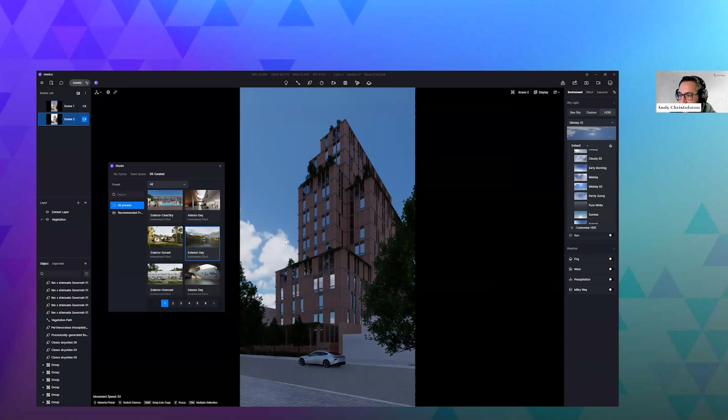I love using Midday 02, just because I get some sort of clouds, and I'm going to toggle on my sun. Okay, so this is the actual sun. If I rotate the HDRI, the sun will rotate as well with it. The problem with that is, let's say there's a specific portion of the HDRI you really like, but you're not happy with the sun position—you can break that with custom right here.

So you keep the HDRI position, but you can change the azimuth, the rotation, and the altitude without changing the HDR image. So you get the benefits of everything if you're using HDRI with a custom setup. I recommend doing that.

I'm going to make this slightly warmer, this is the sun color. Okay, and this looks pretty good. I'm going to save this.

I could add some fog if I want to add some sort of contrast in the background, but I don't want to go too crazy, just a little bit. Again, I always hit update.

And then if I want to go crazy, I could add a lookup table. I could play with the exposure a little bit more, but I'm really happy with how this is turning out. I could add a little bit of contrast, not too much, a little bit of highlights, and a little bit of bloom. So this looks pretty good.

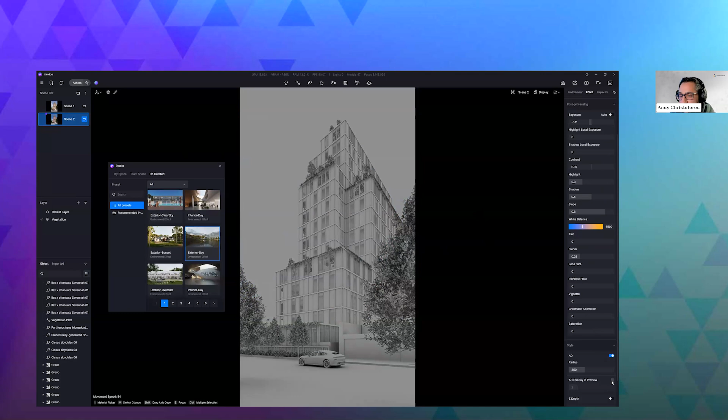Just for the sake of time, I'm going to wrap this up. I'm going to turn on ambient occlusion, and this is where it's going to give me contact shadows. So anywhere you see darkness, those are contact shadows, and you can overlay it in your preview just to get even more realism in all these crevices. So I always have that on—really helps with the foliage. So I'm going to save that.

Now I'm going to render this out. All I'm going to do is go to image, click the 2K preset, and I'm not going to have any channels on—I'm going to leave that all off. I'm happy with the aspect ratio, and I'm going to hit render, and then I'll show you some AI stuff with it, and we'll save that out.

I'm not using the path tracer right now just for the sake of time, but the new path tracer adds some great realism with the reflections and everything. This is also when I start tuning my glass to see if it looks right. So I want this to go quick, so I'm just using the regular previous model. So far we're getting an image in like 20 seconds. If I had more time, I would probably add some decals here, like some fallen leaves, some grunge, that way it's not so clean, but got to respect everyone's time. So 30 seconds for that, then let's go to AI post-processing.

Going to double click my image here, and I can run it through an AI enhancer. The AI enhancer is just going to improve the realism of everything, and it's really amazing. I recommend using it because you just bring your images to the next level for doing nothing.

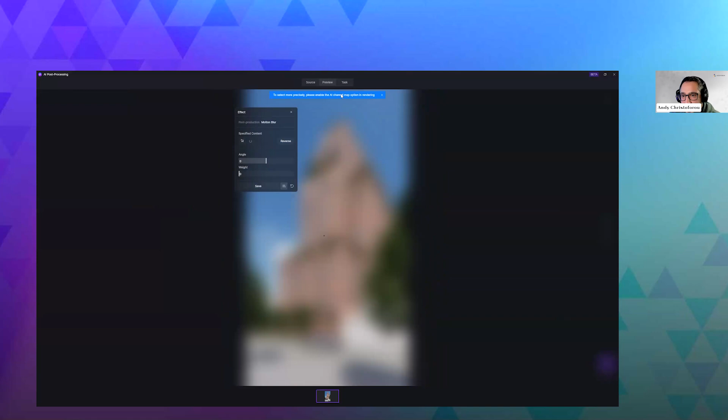You can also, and this is new in 2.10, add motion blur to like cars and everything. You could select, and it's going to generate an AI channel map. That's why I didn't render one before, so you could see this process. This is helping it understand what the image is made up of, it's segmenting it. So if I just select this car here and add an angle and a weight, it'll actually blur out the car, which is really cool. So it's adding motion blur, you see that? That's crazy.

So that's like built-in post-processing, if you want, you have that there. If not, I just do the typical AI enhancer, and that gives me a nicer image quality. It basically makes all the vegetation realistic, the materials realistic.

I will say with 2.10, I've run into a couple issues where it just doesn't do anything, so I'm a little concerned nothing will pop out. But if nothing does pop out, this is what we were able to do in a very short period of time, so I'll leave it there for this demo. I know we covered a lot, but I do want to have some time for questions, if anyone was following along and has a question about the process.

Andy, I'm going to ask a quick question here.

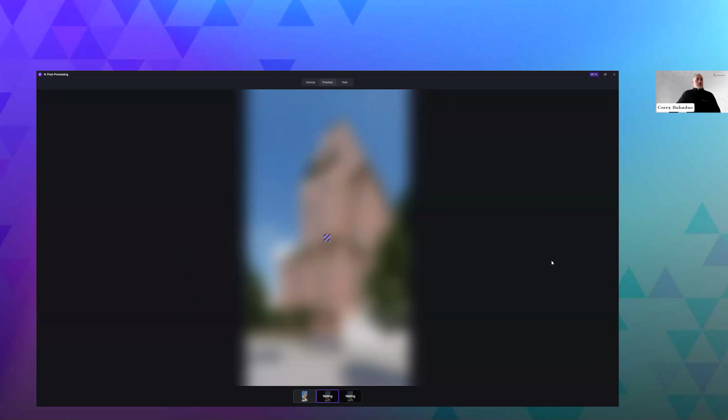This is way in the details technically, but are there snapping controls with the gizmo? So when you're doing the rotating and the moving and things like that, does D5 offer you to be able to snap to 90-degree rotation, for instance? Yeah, it does. I don't think the enhancer is going to work for me right now for some odd reason, but anytime you rotate an asset, let me get out of this.

Just gonna make a new scene. Let me show you, I grab here. It's hard to see, but it's going to snap, you see the 90? So it's snapping there, yeah, it's baked in. It snapped to 180, snap to 90 again. So yeah, it does have that by default. And that's really really useful because I feel like we're all used to CAD, having those snaps, and Revit and all that.

Yeah, I just noticed as you're replacing those, the ivy and stuff, just being able to rotate that really quickly to 90 and have it snap and know that those corners, those cornices are 90 degrees at this point, right? Pretty easy. Yeah, exactly. You don't want that to be off a couple degrees because then it just looks weird.

Weird that my AI enhancer does this now, I don't know why, but it's kind of a bummer. They also added this great in-painting feature, so it can enhance the quality of people and cars and everything, really really incredible. Same thing with the sky, it can completely overhaul the sky and the time of day. But yeah, I always have this issue when I do the live demos, I don't know what it is, it's really bizarre, but that's just the nature of things.

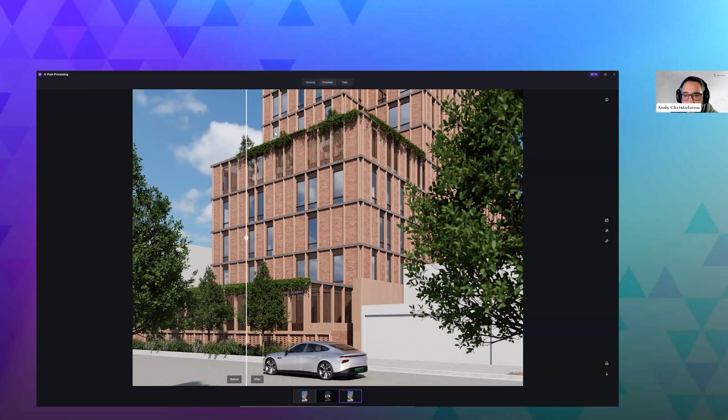So here we go. This is the in-painting, just pay attention to the vegetation and the bricks too. It just makes everything look better, more realistic. Same thing with the clouds, it gives you that extra definition.

So that's why it's worth running it through here. Added some more texture and grunge, and that's something I would definitely do if I had the time, like adding the decaling and everything. But huge improvements, makes the glass and the paint look better. For less than 45 minutes to get rendering quality like this, that's huge. This is, in my opinion - humble brag here - better than the marketing materials this company used. So pretty nuts what D5 can give you.

Yeah, there we go, that's working.

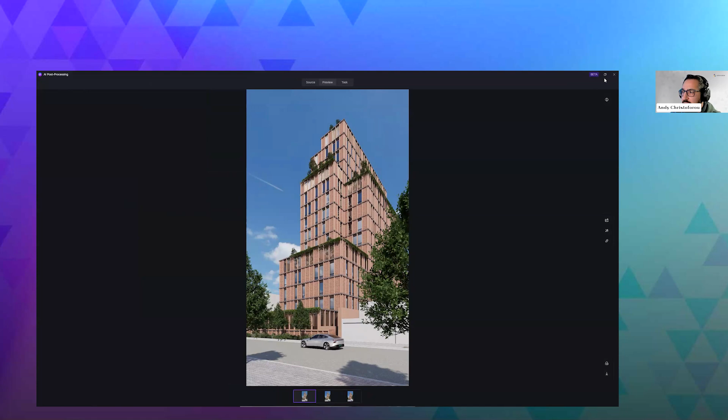Cool, Stella dropped a question in the chat there. Great question, Stella. It works two ways - it really depends on the kind of firm and the kind of client. If it's like a small firm residential, anytime I've worked with them, I have to model everything from scratch.

They'll send me CAD backgrounds because they're still using CAD, and then we'll model it up in SketchUp, do all the architectural shell stuff there, and then render it out in D5. For larger, more tech-savvy firms, I usually get the model already - I noticed if it's beyond one family residential, they usually give you a model because they need it for their own design since it's gotten too complicated, and that usually comes in the flavor of Revit, Rhino, or SketchUp, which D5 handles beautifully.

But it is going to vary - I'm sure there's some small one-family residential shops that model, but based on my experience, that's what I've seen that I have to generate versus getting something supplied. Like this was a larger project, and I know it's a project through Corey, but they supplied the model.

So Andy, you used the SketchUp importer for this particular demo today. What are the other ways to get models into D5, and what are the options of working as in, for instance, exporting out a model, file linking models, et cetera?

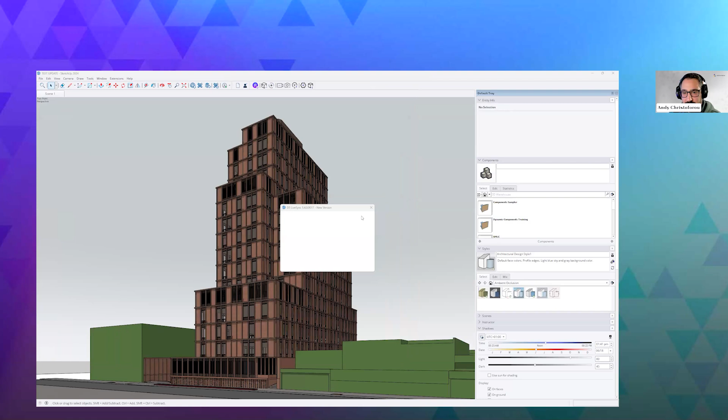I feel like it's really rare that I open up SketchUp and it doesn't hassle me to log in again. So I think we got lucky here. So this is loading. So let's say I've got, I don't know, I've got some, yeah, that's the live sync plugin, and that's what that looks like.

So I'm just going to add, just to keep things, you know what, let's do it proper. Let's just say they're building a skyscraper next door. We've got that. So this is obviously visibly different. I'm going to save that. I'm going to go over to D5 and just hop out of there.

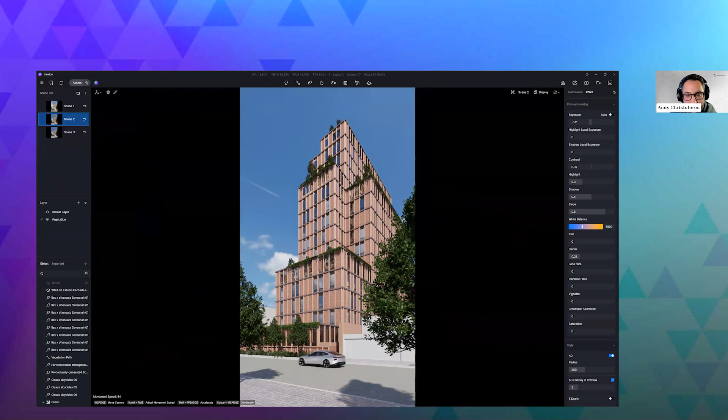I'm going to right click, replace from local, and let me just save just in case I mess up anything here. Replace from local. It's going to ask me where's that saved. I'm going to go to my Dropbox, our ArchVision folder, and I'm going to hit test update. So I've changed the name. I've kept the file location, but it's the same workflow. And if I look over here, there we go. That's our skyscraper. So that's what I mean by the direct import geometry freeze method.

The other method is if I do a live sync. So if I hit connect to D5, it's going to start thinking. Please wait for the delivery to complete. So it looks like it's thinking. Here we go. So this is what I mean by breaking your material. Here, if I clicked update this SketchUp model, it's going to break my materials. If I hit create new link, it's going to be another file.

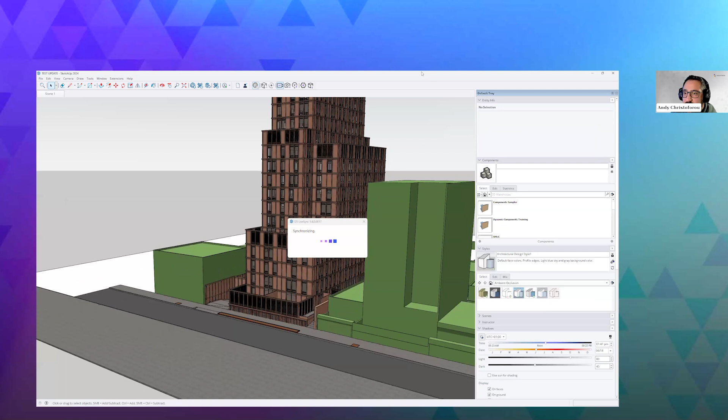And watch this. If I grab this guy and I put D5 right over here, yeah, D5 doesn't snap to windows, which is really annoying. But watch this. As I move in SketchUp, it moves here. So you're seeing this flickering because I have the live sync plugin and the model that I imported directly on top of each other. So I'm just going to hide them.

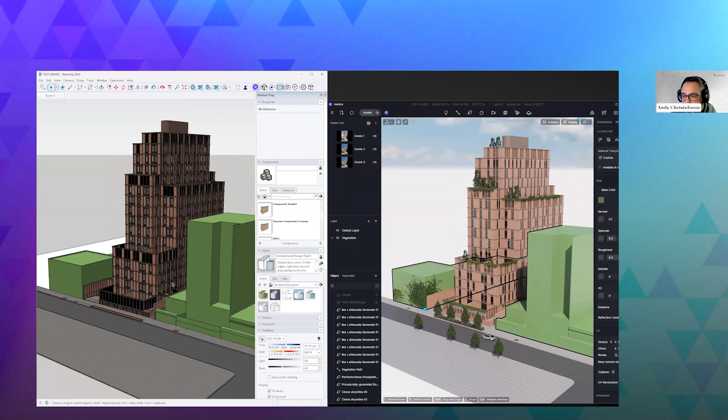So now I can be Mr. Architect. I can push and pull. This will go up, and that should kick in. I might have an older version of the plugin where I have to manually click update, but again, the point stands that it's pretty interactive. So now you've got your little renderer on the right.

Yeah, so I can just, yeah, there we go. So I can go here. Yeah, so that's really it. But yeah, there we go. Now it's working.